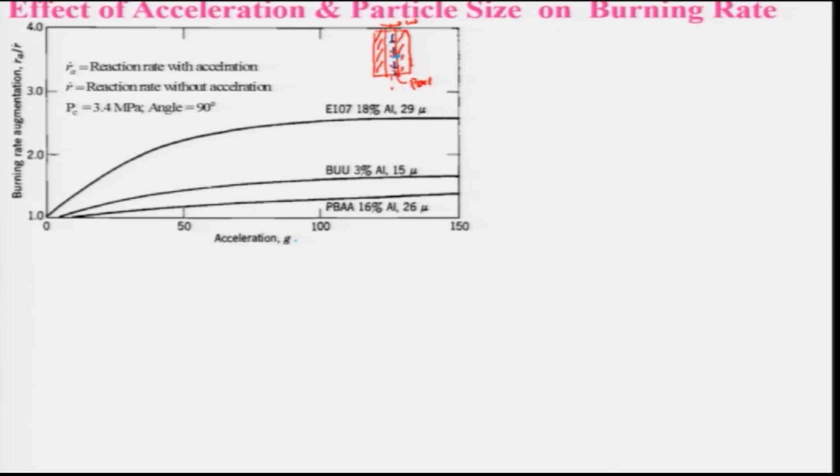This has been plotted with the acceleration g on this axis, from 0 to 150, for 3 sets of data: one PBAA, that is polybutadiene acrylic acid, 16% aluminum, 26 micron size, the rest basically the oxidizer; BUU is your double base propellant with 3% aluminum; and E107 is polyurethane, 18% aluminum, particle size 29. Of course, particle size is changing a little bit, and the chamber pressure is 3.4 megapascal.

As I told, this is the gas flow direction, and the angle of the acceleration is 90 degrees, because of the centrifugal force acting. So, keep in mind that when acceleration is 0, the burning rate augmentation ratio is 1, that means it is the same as without acceleration. As it increases, it increases a little bit, and then it will be much higher with the increase in acceleration. But in case of the BUU, that is double base propellants, you will find there is an increase in the burning rate augmentation for a particular pressure, right.

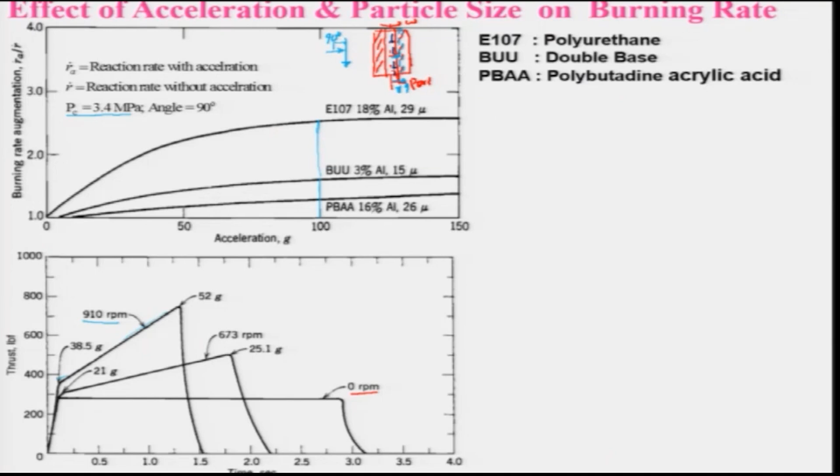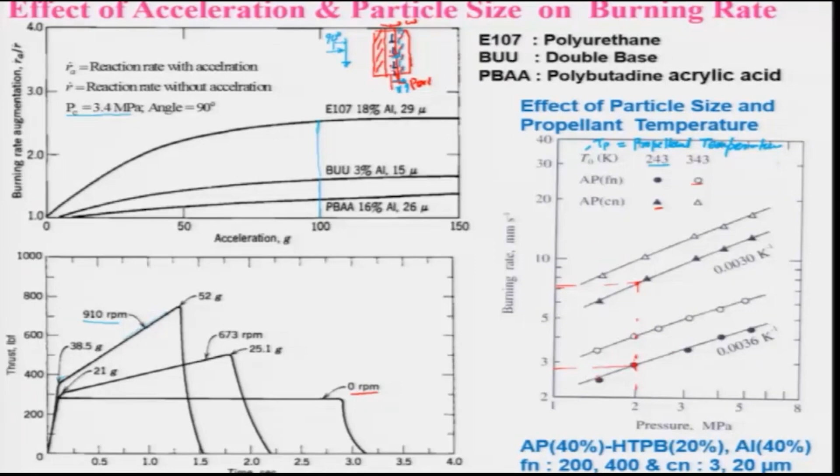If you look, this is around something closer to 3 mm per second, whereas if I consider this, it will be something around 6-7 mm. There is almost a twofold increase in the burning rate, and when the temperature increases, of course, the burning rate increases for the same particle size. So, therefore, when the particle size becomes smaller, the flame will be closer to the burning surface, and therefore more heat will be transferred to the burning surface, such that the propellant will be regressed quicker, and the burning rate will be increased.

So, let us look a little bit further at the effect of particle size on the regression rate in the case of a double base propellant where we are adding ammonium perchlorate. If you look at this experimental data, burning rate in centimeter per second is plotted on the vertical axis, and on the horizontal axis is pressure.

You can see something very interesting here. For the double base propellant without any ammonium perchlorate, particle size will not be there. This data corresponds to the double base propellant, and you can see the burning rate is increasing with the chamber pressure, but it is not linear in this log-log plot. It is a little curved, and that is defying the law we had learned, the Saint Robert law, r = aP_c^n. According to this law, the plot should have been linear.

Now for the modified double base propellant, when you add 20% of AP, you will find an increase in the burning rate for a particular pressure, let us say around 14 atmospheres. This also is a curved one. When you increase to 30% ammonium perchlorate with the same particle size of 150 micrometer, there is also an increase in the burning rate. However, the curve is a little non-linear in this log-log plot, it is not a straight line.

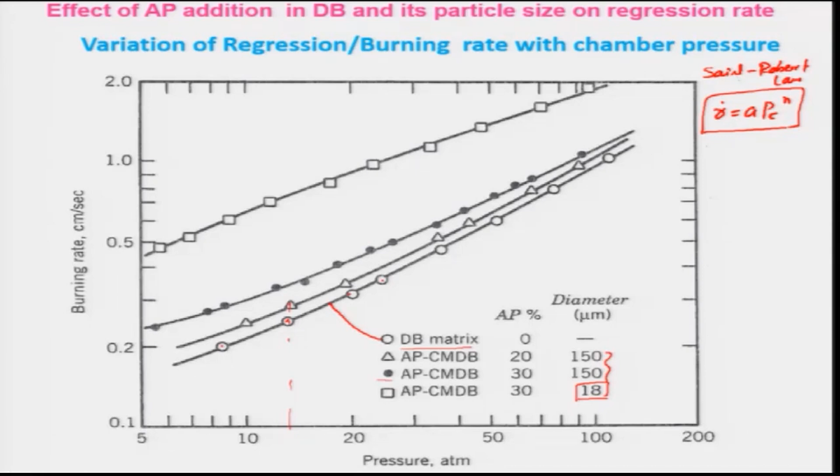The other thing is that when you add ammonium perchlorate to double base propellant, there will be an increase in burning rate. And when you reduce the particle size of the ammonium perchlorate in this composite modified double base propellant, you get enhancement in the burning rate.

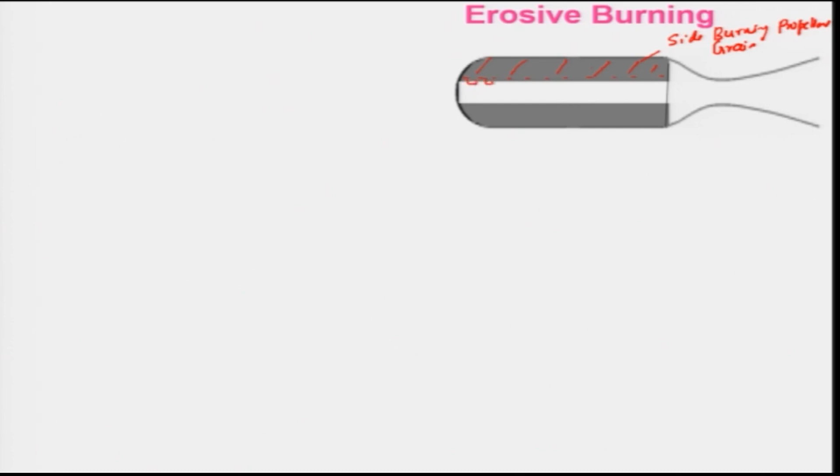So, let us look at erosive burning. As I mentioned earlier, erosive burning can occur only when the velocity of the gas inside the port is high enough that it affects the regression rate. Consider that this is your propellant grain, a side burning propellant grain. When it regresses, the material on both surfaces will be converted into gas, and it will be moving toward the nozzle. The flow will be coming toward that.

Keep in mind that the mass being added is the mass of the gas; the propellant converted is equal to the mass of the gas. There will be accumulation, and the velocity of the gas, Vg, goes on increasing along the length L of the port. So this velocity of the gas will be increasing towards the end of the propellant grain.

If it goes beyond a certain limit, there will be a lot of mixing and heat transfer from the hot gas to the propellant surface, and that will increase the regression rate of the propellant. This occurs particularly for a longer side burning grain, and also in the initial stage where the port area is smaller compared to the throat area.

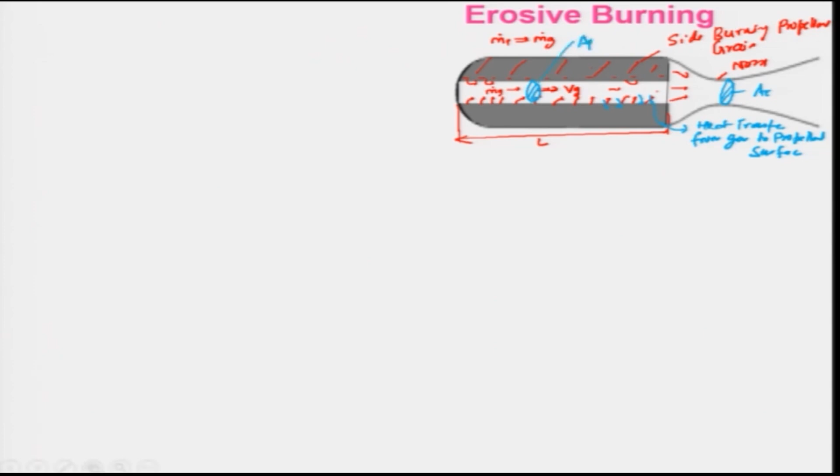This is your throat area, and if you look at this, this is my port area AP. So then at that time the erosive burning will be occurring, and this can occur only when this Vg will be crossing a certain threshold value. You can see this erosive burning.

And this erosive burning ratio is basically, if we consider r dot EB, it is nothing but your r dot, which is the normal burning, like we have seen without any erosion of the propellant, plus r dot E. If I divide this equation by r dot, this will be equal to 1. So I will get 1 plus r dot E divided by r dot.

And keep in mind that this is known as the erosive burning ratio, and this is nothing but your r dot Eb divided by r dot. So you can see from here that erosive burning is remaining constant for a particular reference propellant grain, and it will be remaining almost constant. Then this is your threshold value.

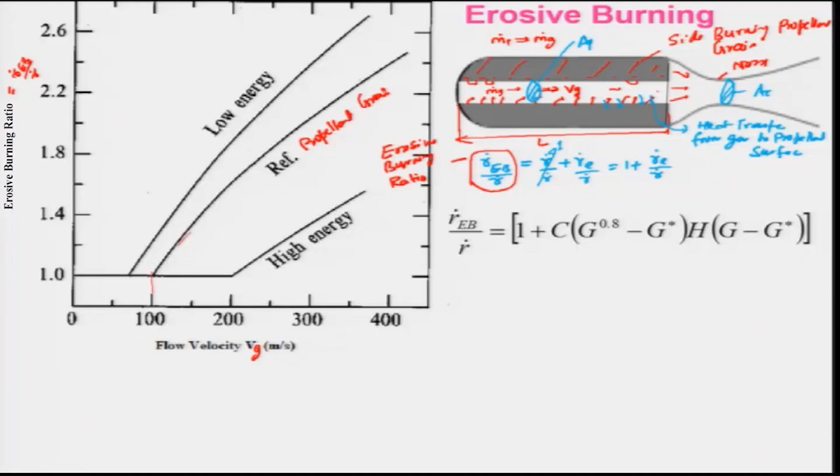And if I look at this r dot Eb by r dot, I can express it as 1 plus C into G power 0.8 and H of G minus G star, and this is your Heaviside function or the step function, where C is a constant and G is the specific mass flux rate of the main flow. And keep in mind that this r dot, we know, is a Pc power n, and this is basically your Saint Robert's law, and where there is no erosive burning, this r dot will be prevailing.

And this G is the specific gas flow, which is nothing but rho G, the density of the gas, which will be dependent on the chamber pressure. VG is the gas flow velocity, and rho P is the density of propellant. r dot I have already explained, that is the burning rate of the propellant without any erosive burning. And Re p is basically the Reynolds number of the port. This is your port area. G star is the threshold specific mass flux rate, which happens to be about 35, corresponding to certain data given by Mukunda and Paul.

And as I told, H of G minus G star is the Heaviside function, that means it will be remaining 1 or 0. VG is the gas velocity over the propellant surface, and erosive burning can be minimized by designing with a large port to throat area, if this port area is larger as compared to the throat area AT. So besides this, if the length of the propellant grain is smaller; erosive burning must be avoided, because it will be creating problems. Keep in mind that erosive burning will be occurring only in the initial stage. Later on, when the port area gets increased, this effect will be nullified or reduced.

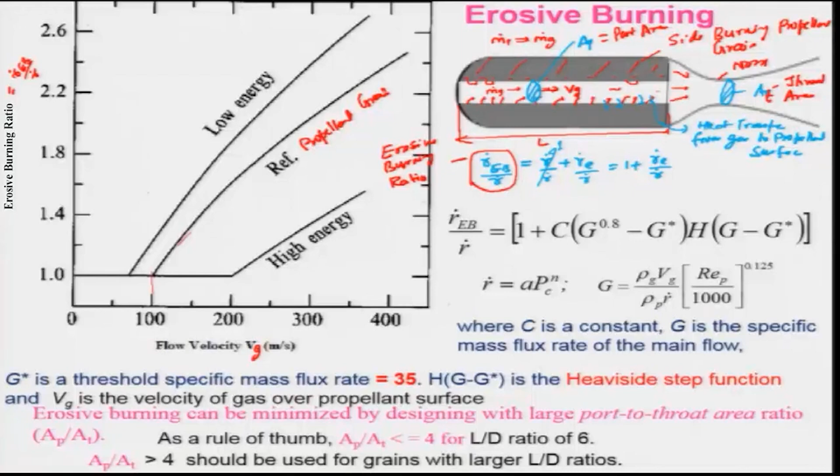So, as a thumb rule, if AP by AT is less than 4 for the L by D ratio, then erosive burning will be occurring, and if it is greater than 4, then naturally it will not be occurring at all. Similarly, a larger AP by AT should be used for grains with larger L by D ratios, such that one can really avoid the occurrence of erosive burning. So you can see that there are various ways of eliminating the occurrence of erosive burning, and we will see the implications of erosive burning in a solid propellant rocket engine in the next lecture.